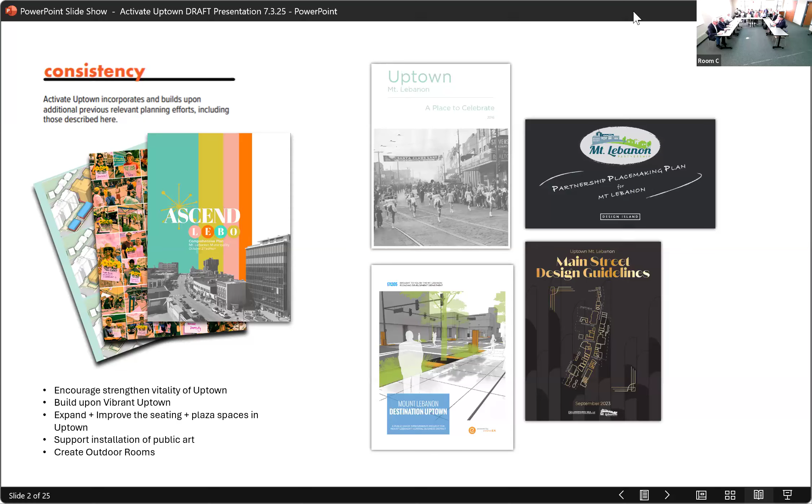So there's a lot of thought that's been given, not just in the Activate Uptown process we embarked on, but in previous iterations. In addition, when we were doing the Vibrant Uptown planning, we wanted to set the table for where we're going now with this direction. As a reminder, that was the $4 million streetscape project that is complete, where we put in new sidewalks, conduit, dark sky lighting, irrigated planters, native landscapes, and refreshed public spaces.

So, Clock Tower Plaza is a good example of what that is.

So this is the next evolution, and I mentioned the 4 different key nodes. Within those nodes there are additional sub-nodes, if you will, and we'll go through some of that, but those are the 4 key areas, which you can see illustrated on the slide. To the far left is the Clearview Common node, which also encapsulates Alfred Street, Parse Way, what I call the portal, which is the stairway connecting the PRT station to Washington Road, and then Clock Tower Plaza, which is currently where East End has a tap room.

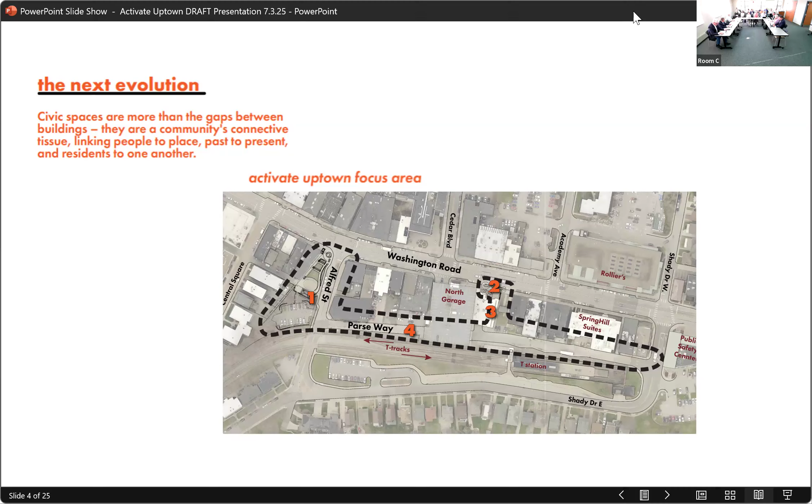It's advancing on the laptop, but not on the screen. It says my internet connection is unstable. Oh, here we go, it's stabilized. You just have to stand up. Yeah, this is like rabbit ears, you have to stand there. Give me some aluminum foil.

So Clock Tower Plaza, again, this is located at the mouth of the portal, as you can see there. These are some images of current conditions. You can see where East End Tap Room is, and you can see the mouth of the portal in some of these pictures.

Okay, so some of the ideas here that we wanted to bring to light: one, tying in the PRT station. So you'll see at the mouth of the portal PRT's graphics, that's their approved new imagery, to allow people to understand that this is the access point to our light rail station. We've heard this from Scott, who owns East End Brewing, but anyone else that's there, this gets fully exposed to sun in the afternoon, so the introduction of sunshades, you can see that here.

What you can also maybe see is that's a very long street seating wall along the planter, so there's a proposal for public art there. As you're coming up, this is really a gateway into Mount Lebanon, so here's an opportunity for public art and introducing the community to folks in that special sort of way.

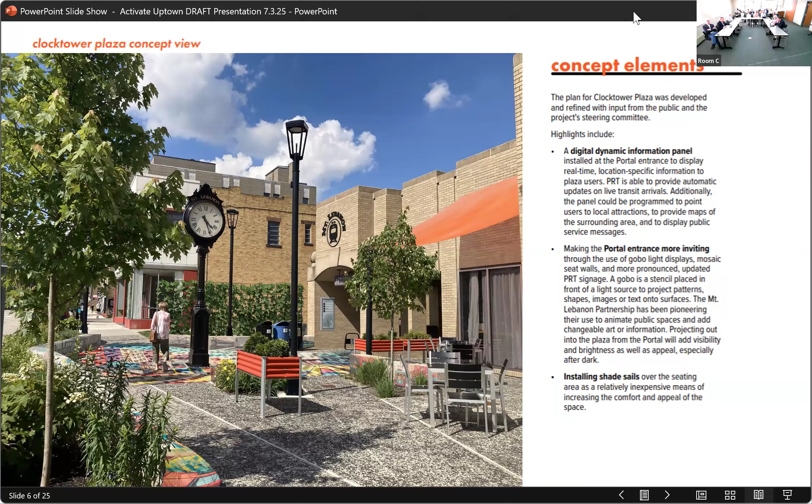So the portal is a really exciting opportunity to celebrate coming and leaving Mount Lebanon, but mostly we like to think of coming. Right now, it does have some architectural design features that are worthwhile - it has a barrel vault, it has something called an oculus towards the end. But other than that, it's a fairly utilitarian space and really doesn't celebrate or reflect the community, in our opinion.

So working with the steering committee - and I should have mentioned, I'm sorry, when we first started, the steering committee was instrumental in helping us shepherd these concepts through the public engagement process. So I just wanted to mention that.

We also heard from people in the public, from surveys and things, that this staircase felt dark even during the daytime, and it was hard to find - some people didn't even know there was an elevator there. Thank you, Sarah, and I think this image kind of illustrates that.

So through the planning process with the steering committee and public engagement and a survey, which also had a very robust response, I put that in the commission packet and memo - we had around 1,300 responses.

So again, I hear there's sometimes survey fatigue in this community, but I've not experienced that. What I've experienced is residents do want to share their thoughts and opinions, and this survey was another example of that. We had a very strong response with 1,300 folks responding.

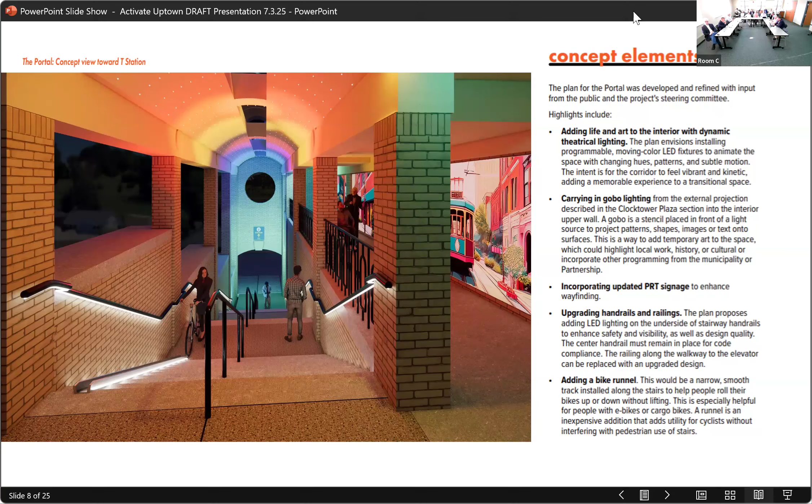So you can imagine this in the evening really being something that pops and sizzles, but it will also have that same effect in the daytime. I love this because it's simple and it's effective. I think it's marvelous. Just go with what's there and oomph it, as I like to say. Thank you, that's what we want to work off - the good bones of the existing streetscape and what we have. Very wonderful, so it's right on.

Sorry, there was a little bit of a delay here. So Parse Way has come up time and time again over a number of years. For those who don't know, it's the service alley that runs to the east of Washington Road. It's below grade, and it's sort of a crazy quilt of different uses and materials. I think these photographs give you a flavor of the current conditions of Parse Way. The municipality owns a portion of the cartway of the alley, but the lion's share of it is PRT property. So just to orient everyone to that.

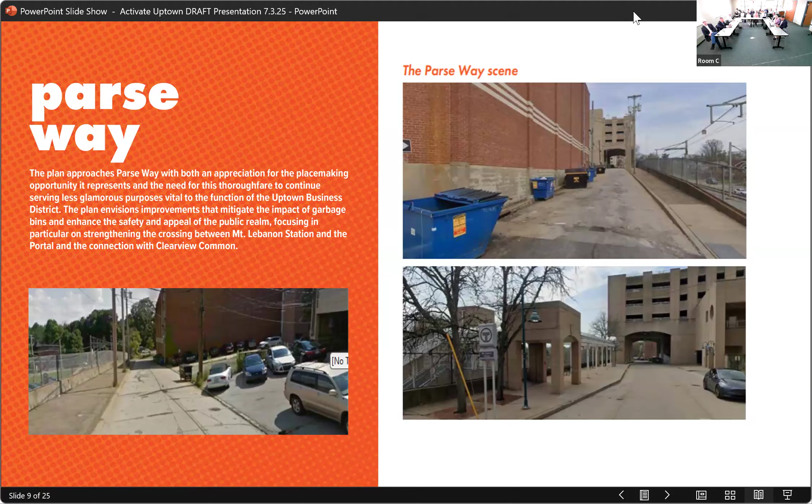There are a number of dumpsters there. We have a very vibrant business district, with a number of businesses. Those dumpsters are used by businesses on the east side of Washington Road, but also on the west side, because we do not have an alley over there. So that has led to a corral of dumpsters back there, which are not exactly the most aesthetically pleasing vessels, but necessary for the active businesses we have. You can see the entrance to the PRT light rail station in the bottom right-hand corner. So again, this gives you a taste of what the current conditions are.

Now there's a lot here to unpack, I try to be succinct with this because there's a lot on here. But what's being proposed in this slide is softening the alley with additional greenery, bringing some of the landscaping intents that we see on Washington Road down to Parse Way. What you don't see so well here is the sidewalks down there - if you've ever been down there, they're also sort of a crazy quilt of materials. You have asphalt, aggregate, concrete, you have everything. So unifying the sidewalk that's on the PRT property.

There were ideas introduced about improving the chain link fence there by adding some public art. This has come up time and time again, but adding some woven type treatments to soften that experience - basically creating a screen wall for the dumpsters so they're not quite as visible, while still allowing access for the businesses and folks servicing those dumpsters, but eliminating the unsightliness of it. There's also been discussions about marking the pavement better so folks have particular areas where the dumpsters go, so they don't migrate here and there, which helps with our code enforcement issues. Do you guys want to talk a little bit about?

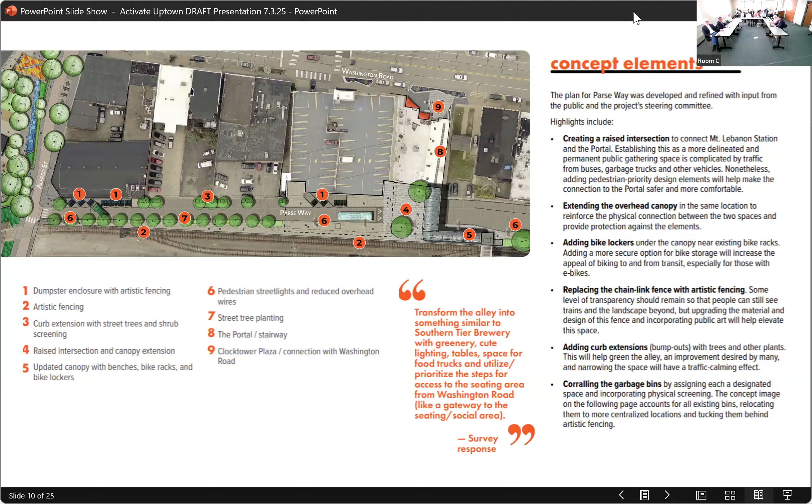If you missed them, go down to Parse Way, there are still a few of those there. So this would be an opportunity to refresh that and bring the design elements from the Vibrant Uptown project down here as well. That's something else to consider.

Now we're moving to Clearview Common and the Alfred Street corridor, and it's something I've been dubbing the big idea. Again, to Commissioner Silverman, alluding to what he brought up before, we're about to look at some big ideas and big concepts.

Within all of this, there are what I'll call a la carte options and very implementable things that we can do starting potentially as soon as next year, and some others that are more long-term, long-range thinking.

So I just want to preface it before we dive too deep into this. I think hopefully we're all familiar with Clearview Common. This is the parklet at Alfred Street and Washington. It's where Final Fridays are held, as well as many other things.

We've had weddings here, we've had lots of different things, and folks enjoying lunch or just trying to get off the hustle and bustle of Washington Road.

It's very difficult to see the pie chart, but one of the things we found, and it's not shocking but it raises an eyebrow, is that it's not really used that much.

We have some weddings there, and you will see people sitting there, and you'll see teenagers hanging out with their friends and things of that nature.

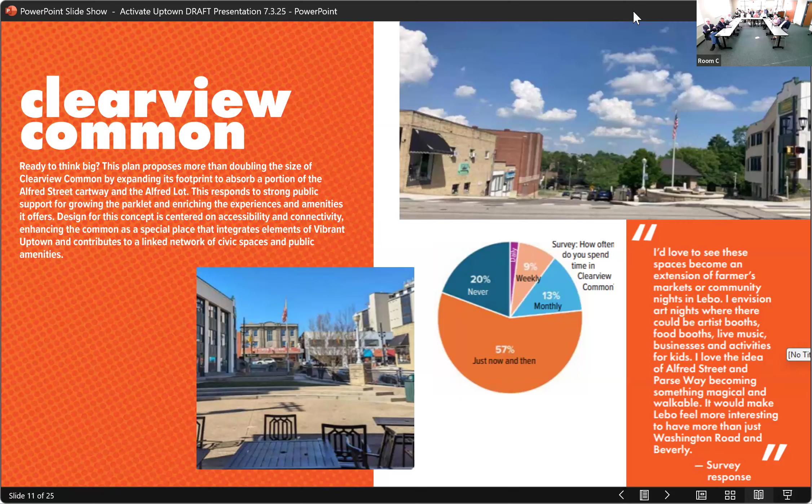Offline, I'll have to ask you to describe a meeting in a box. Sounds like... Oh, I apologize. Well, that's a very clever term from the Pashek Posse.

Basically, it's sort of a charrette on the road. They prepared a series of materials for myself and steering committee members to go out into the community. So I went to the rec center, I went to the library, went to a number of places with this kit, this meeting in a box.

So more of a pop-up? A pop-up charrette. You have the props and everything charts you need, whatever. Exactly, it sounds like you're meeting in a phone booth. No, well, if I could find a phone booth, maybe I would do that. But it was a really great concept that Patrick brought to the table.

And so that was just another way to engage people. We had cards to hand out where they could go and do the survey, and I think that really drummed up a lot of interaction via the survey. So that was just something that a lot of people expressed to us.

They're like, I don't really go to Clearview Common, maybe if there's a Final Friday or something, but now I don't go there, why would I? So we were trying to tease that out, or what would make you go there, and what would make it a destination, and not just a pass-through or a special event area.

So there's a series of concept elements here, but these images paint out sort of three different scales of what can be done, and we're going to walk through them. We're really going to spend a lot of time on the big idea, so I'll save that for when we get to those slides.

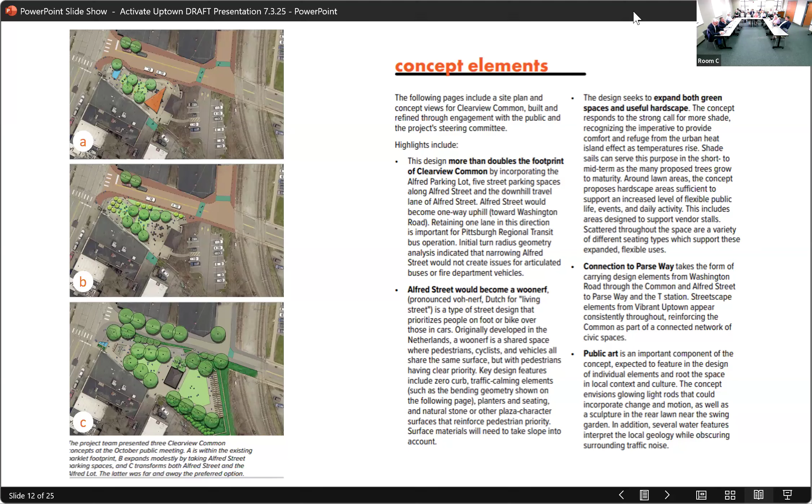Just to riff on that a little bit, I've heard this time and time again. One of the questions I get all the time is, why don't we do the farmers market down there? Because they don't want to be there, and it's that simple. It's below grade, you're shoehorning them in. It's very difficult to program anything there aside from a concert — it's really designed right now more as an amphitheater with the pavilion. When we've tried the farmers market and similar things there, it always fails. So we've adapted and adjusted, and the Uptown Farmers Market is what it is and where it is. But there's opportunity to use the space for things of that nature.

So this is getting into the big idea. This is sort of a bird's eye view of it. And it's not just about expanding the park in terms of footprint — it's also about creating a much larger zone of interest.

So let's start up at Alfred Street. You can see on this picture there's a call for a change of material on Alfred Street on the cartway, also eliminating the curb so that the street becomes level — it's a concept that Commissioner Flynn or someone else could explain better, but it's a really good one. The concept is fantastic: you're really creating a level playing field, providing a space that is more pedestrian scale and pedestrian friendly. You can't change the grade there.

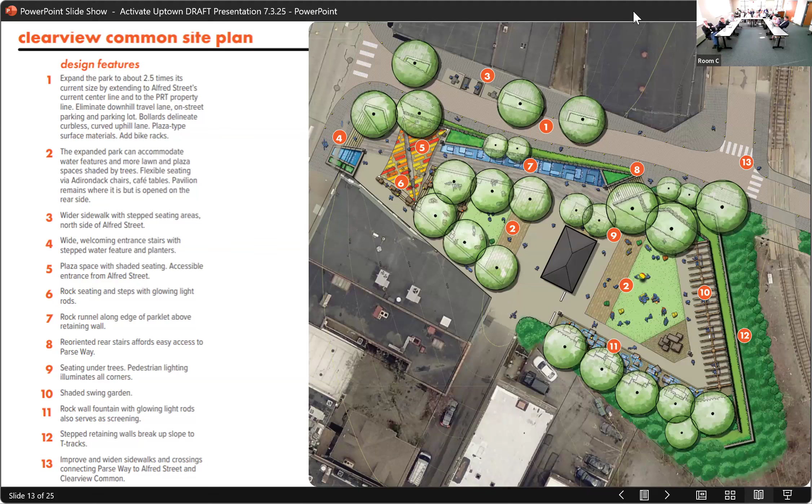We'll get into the programming and details in a little bit, but I just want to give you a broad overview. Adding new water features, additional landscaping, additional seating options, a plethora of seating options beyond just tables and chairs, really softening this up and making this an oasis point as opposed to a sidewalk on steroids with a pavilion in the middle of it.

So this is where the imagery starts to really sizzle. I think when you see these dimensional pictures, it speaks a million words about the design intent of what's possible.

I'm going to start to the left, which is currently the Alfred lot. We heard from people that they wanted different options to sit and talk to their loved ones, friends, whatever the case might be, looking for different ways to do that. On the far left, you can see some swinging benches, which offer a very relaxing opportunity to sit and enjoy a conversation or a meal or just people watch.

You see a green lawn area, which provides a space for people to simply picnic or spread out or throw a frisbee, a micro disc. There's a series of blocks there, a placeholder for the opportunity to add some sort of public art element to the area.

A water runnel, basically a cascading water feature, which provides visual interest but also adds audio stimulation and kind of deadens the sound of Washington Road. It really gives you, going back to the word oasis, creating more of a pedestrian oasis point in the middle of the central business district.

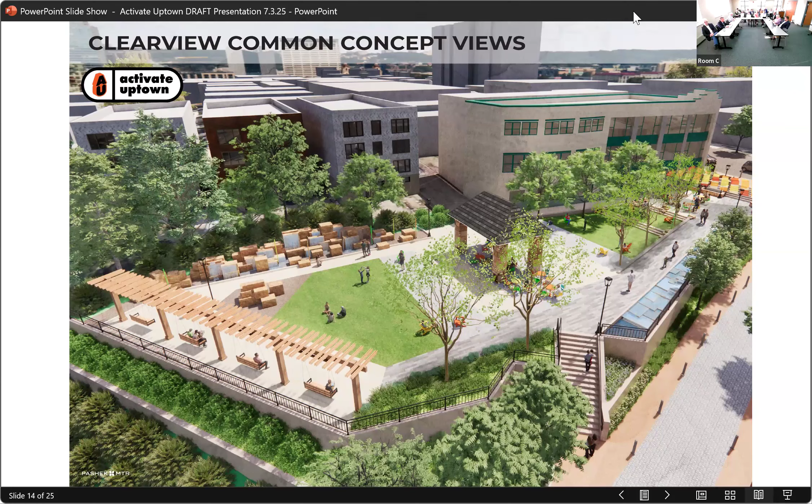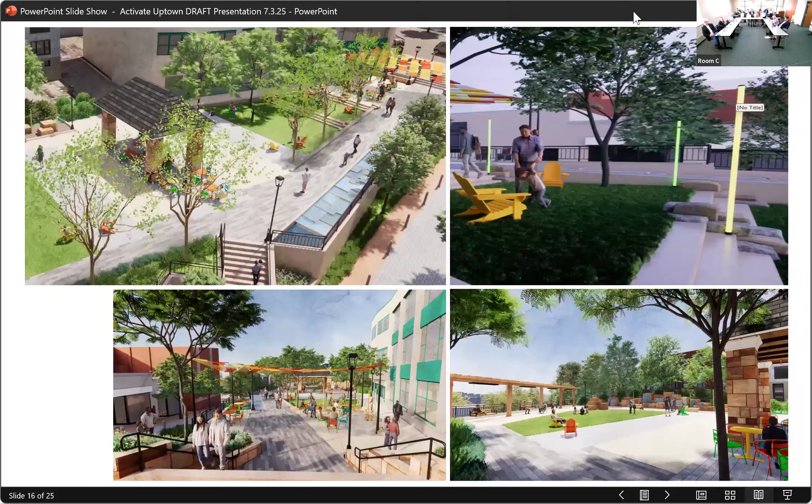Yes, I think, let me advance. This is a lot of what we spoke of, just as a close-up of that. And it's hard, you can't really see it, it's difficult to see here.

There is a notion, to your point, Commissioner, that especially by the fountain, there's a very precipitous grade as you go around that. There was discussion of feathering that out and finessing it to create a better grade for folks to access. Part of how we're able to do that is moving that fountain and creating more of an open entrance.

Also reducing Alfred down to one way and getting rid of that parking lane allowed us to really widen that area and make it a little bit flatter and easier to get in.

Sarah brought up a good point, I was going to get to it eventually, but Alfred Street would become a one-way street under this big idea concept, leading from Shady up to Washington Road. PRT was involved in those discussions about that turn radius, which came up during Vibrant Uptown as well, but the scope of that project really wasn't addressing the things we're looking to address now.

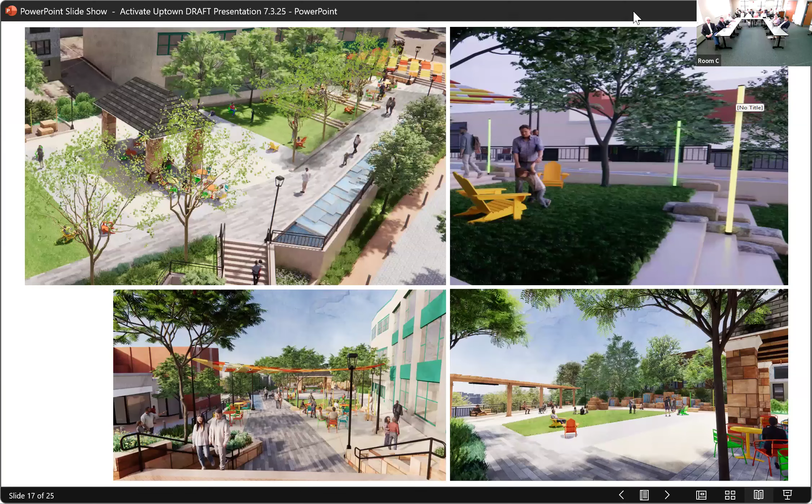So, is there any further questions? I know we're taking a lot of time and we have other folks here, but there's a lot to unpack, and you're gonna see that here in a few seconds. I don't want to speed through these next few slides, because this is really where, no pun intended, the rubber hits the road—looking at implementing.

There's a lot of stuff in this, and you received it in your packet. Patrick will be doing a report which will tease out and provide further narrative and backup to a lot of what we're presenting here this evening. Tonight is more about showing the pictures and giving you a sense of cost, things of that nature.

Moving to implementation, obviously everything costs money, so there's the notion of raising funding. The municipality would be putting some dollars to this project, but we'd also be going out to the state, the county, foundations, and other places looking for grants to bring in other dollars. We brought in $1.2 million for Vibrant Uptown, and I anticipate as we go through this process we can bring in that amount, if not more.

Again, this is a high-level concept, so as we get direction from the commission and the steering committee about how you'd like us to eat this elephant—because you don't eat it all at once, you eat it one bite at a time—there are a number of things that need to be done before we can actualize a number of these things.

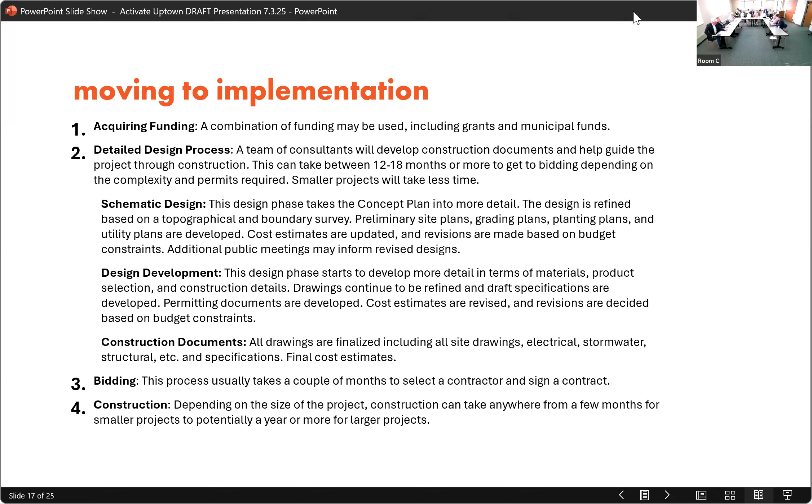So this gives just a nod to some of the potential phasing. I'll just say it right now—what I'm hoping to do in the short term is bring some potentially new furniture and sunshade, things of that nature, things we can start to implement that are scalable and don't require schematic drawings and construction drawings and PRT coordination meetings, so we can start getting to work on some of this stuff. There's a lot we can do at the portal, a lot we can do in Clock Tower Plaza—a lot we can do with Activate Uptown that we can start doing sooner rather than later.

But there are some things in Clearview Common that are going to require further study, further design, further engineering, and of course a lot of fundraising. And then we also have other projects on the horizon that we need to take into consideration. So this gives a notion of some of the phasing, and there's a lot here with numbers—we could be here for quite some time, and I know we're going to have a lot of dialogue and discussion. But these are the opinions of costs broken down into each of the nodes.

These were in the packet, but I can quickly go through. They give you the high level number, as well as some price escalation. And then we baked the 30% contingency into this, knowing that there are known knowns, and there are unknowns. So we put in a little bit higher contingency than one would find in a lot of projects. But that's just to provide us some cushion as we go through the next phases of decision making.

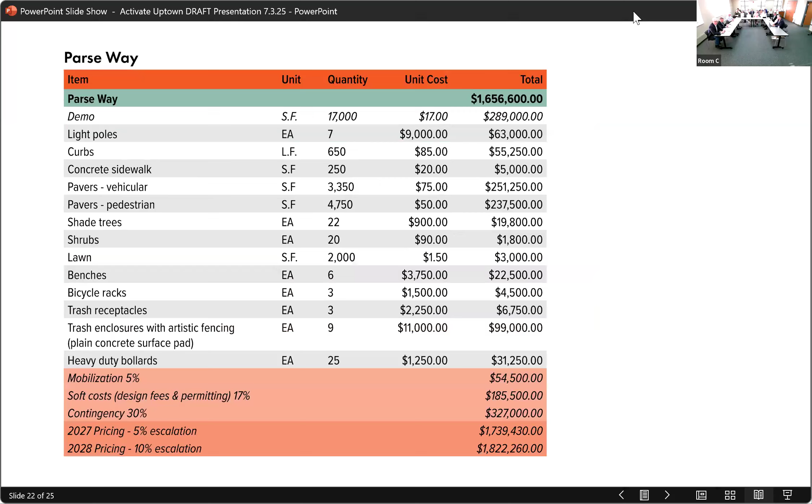So this just breaks it down, and again, I don't want to bogart the meeting here, but we'll get to the final one. So the total opinion of cost is running at just north of 7 million, and you can see those escalation prices.

So the steering committee is still active. That's members of the design committee, members of the mobility advisory board, resiliency advisory board, PRT if I didn't say that already, and this litany of folks. So they're at the ready to continue working with us as we march down this road.

I am going to be putting a few different elements of this into my 2026 budget. Not shocking, and I'll be very pragmatic in how I do that. This will also be baked into the CIP, so those numbers, now that I have them, will go into the CIP. Obviously our finance director and manager will be reviewing those things. But this is a journey we're going to be walking on. This is not an overnight project. But there are things we can do today, things we can do tomorrow, and things we could do after tomorrow. This is the Activate Uptown plan.

I think it's fantastic, I think it's great work. I appreciate all the effort that went into it, all the public input. It's an incredible number of responses, very thoughtful. Having gotten to take part in a good deal of it, it was really great turnout. There's a lot of feedback, and I think what you've come up with would seriously strengthen Uptown.

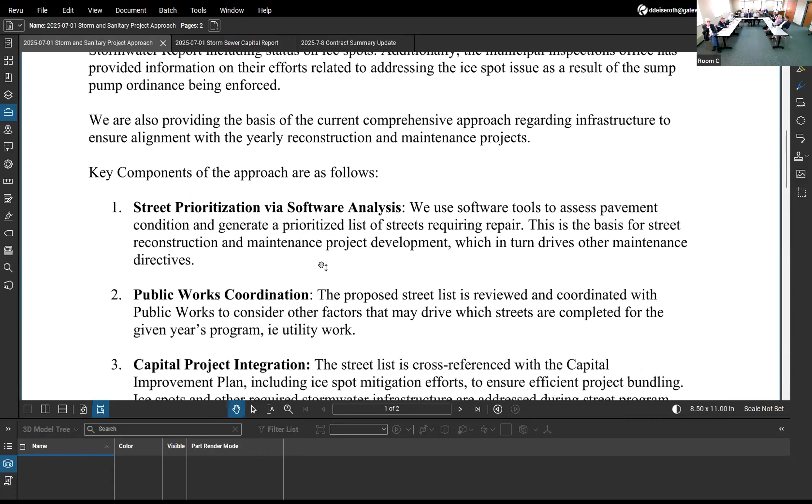Right now we're using prioritization through software. We also look at that list with Public Works and identify if that's the correct list, do we need to move anything up? That's a back and forth, but we use the software each year to develop the scope of the project based upon the condition of the road.

And then we coordinate with other things going on, other factors that might drive us. Are there utility companies doing work? Is there any other municipal project going on? For instance, this year there was a mobility issue to do some safe streets work on Scrubgrass, and we had paving that needed to be done before that. So that type of coordination makes sure we're not tripping over our own shoes.

So we do that, and then we integrate capital infrastructure, if there's anything that makes sense to bundle, as we did on the stormwater project with the road program this year. We bundled in the Ordale work, take something off the list, get something done, and it's much more efficient that way.

And then, as we talked about, we use GIS to make things come together, keep records, and make sure we do this in the best approach possible to know what we're doing from one side of the street to the next.

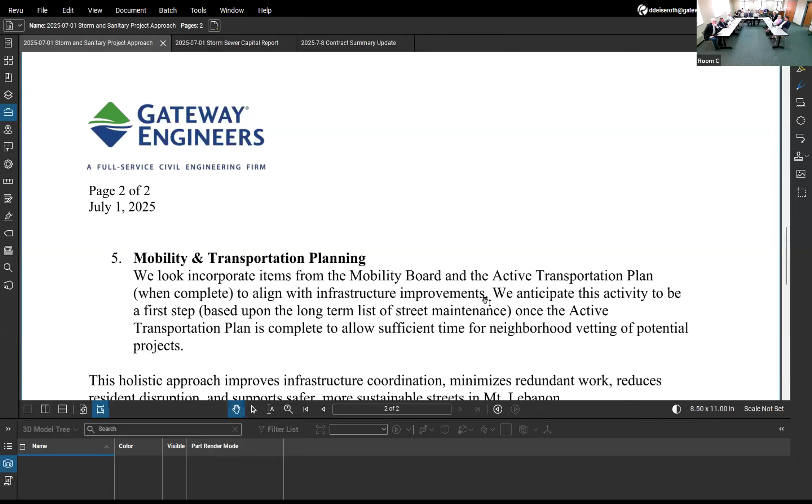And finally, I think the add-on to this is going to be the mobility and transportation planning part. When there's an active transportation plan complete, it'll be important for us to project ahead what roads are scheduled. And when we get into infrastructure that may be incorporated into streets on the list, that's going to require vetting of the neighborhood, making sure we have things lined up so that when we pave the road, we have any active transportation items covered there. So I think we do have a good holistic approach to this, and it's working well.

It can always be improved, and we continue to look for comments or anything that anybody thinks we can do better. So that's that. Any questions?

This isn't as exciting as colored pictures. I realize that, I'm trying my best. I'm looking at the audience, they're awake, so this is good, it's all right.

Yeah, nobody's sleeping yet. So the exciting thing is the next part of this is that I told Keith I thought it would be a good idea to give the commission an update on the 28 active contracts we have going on right now in terms of projects.

So we are making progress. This is a big community, there's a lot of infrastructure, there's a lot of old infrastructure, and of course there's a lot of projects that come related to that.

So just to kick it off, we gave you the list, but we broke this down into different categories. The first one up here is the point repair contract, lining, and CCTV. This is work that we bid annually or renew annually.

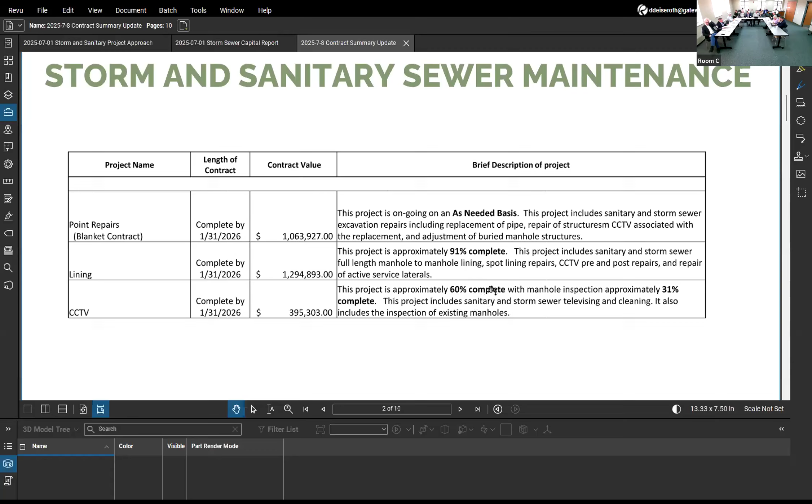Those projects are moving along. The lining project is already 91% complete, that's good, and the televising is 60% complete. So we've made good progress on those. We're halfway through the year, and we think we're in good shape.

The manhole rehabilitation project that's ongoing should be complete by early fall. It's about 33% complete right now, based on information that's been sent to us.

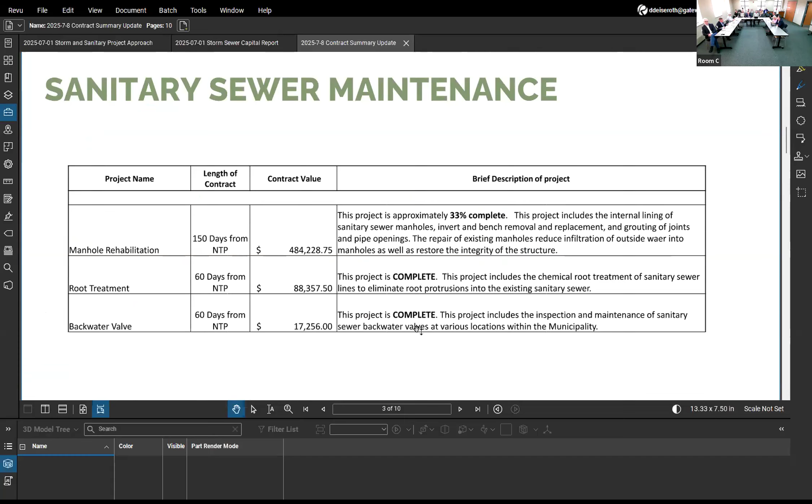Root treatment program and the backwater valve program, those are both completed. Those are typically done earlier in the year, and those are completely done.

And then the consent order, we have two big projects going on right now. The first one is our second project to meet the goal line standard. They're approximately halfway through that project. That's one where we're doing full length lining of sewers again.

We're doing adjustments to anything that needs to be done, and we're doing manhole rehabilitation as a part of that project. That one's 52% complete.

Then we have the Begg Snyder project. This is one where we were fully funded through GROW grants and the small sewer and water project. All the excavation work is complete. We're waiting for the contractor to get going with the lining and repairs to the manholes to complete the project. So that's going well.

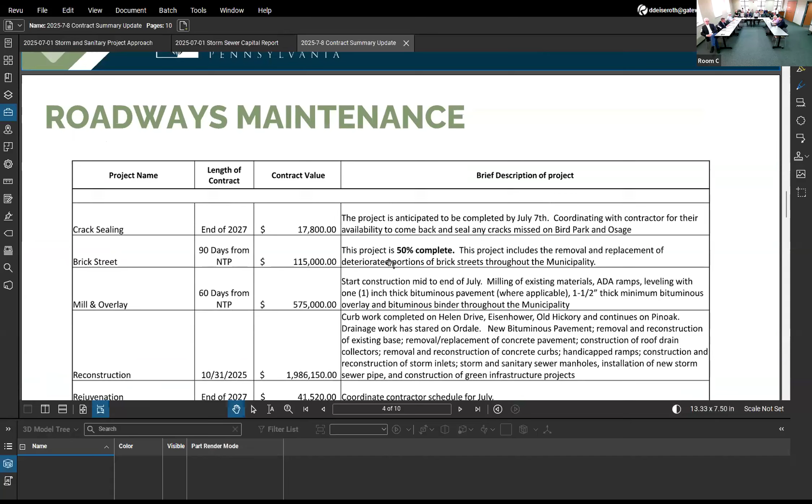Then on the road side, jumping into the road maintenance list, we have the crack sealing contract that should be wrapped up this week. They were projected to be done yesterday. Brick streets, it's about 50% complete at this point.

Mill and overlay, that's projected to kick off at the end of the month. Road reconstruction is underway. Curb work's been completed on various streets and continues on Pin Oak. And then the storm sewer project is in progress right now on Ordale before they reconstruct that piece of the road.

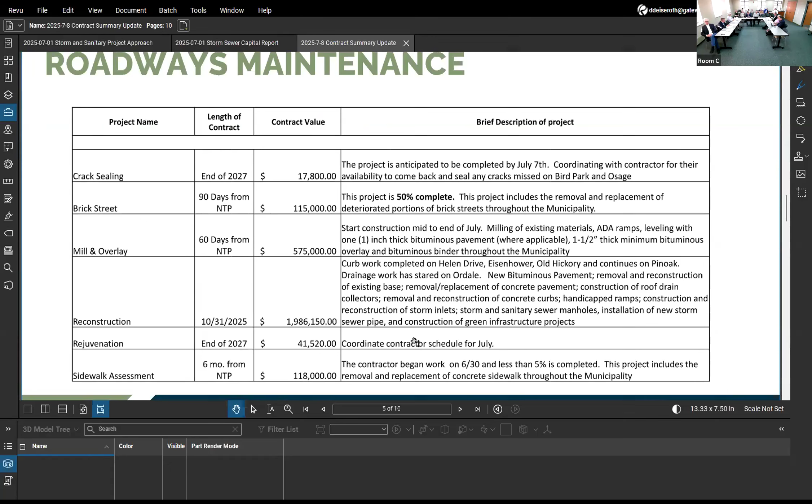The Rejuvenation project is anticipated to kick off at the end of July. And the sidewalk assessment project just kicked off last week, and it's approximately 5% complete, but it just got started.

On the pedestrian mobility and maintenance side of things, the curb work, this is the municipal contract for concrete curbs in anticipation of the paving program. That's complete. The sidewalk root control program, contractor's working on this currently. We didn't have an actual percentage complete, but he's making progress.

Washington Road, the accessible pedestrian system upgrades. This is an upgrade to the traffic signals. Work's ongoing with this, and materials have been ordered, and once they're brought in, they will be installed.

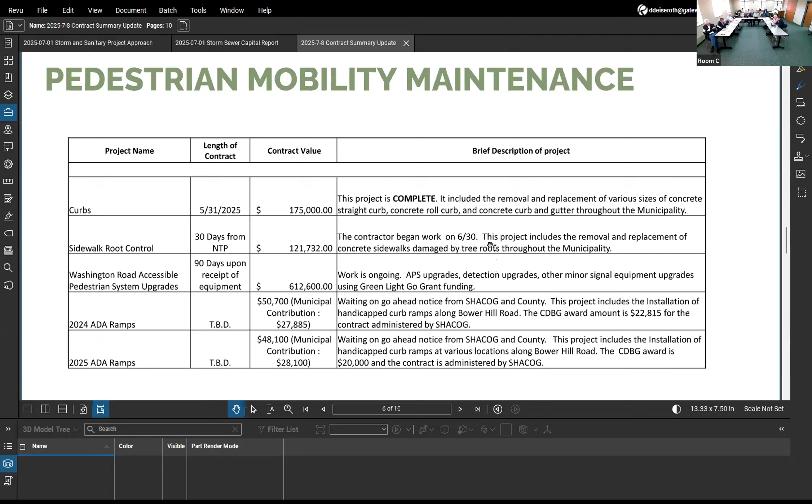The ADA ramps, we're waiting on those to be determined on the go-ahead notice from SHACOG. We do that through SHACOG. We have both the 2024 ramps and the 2025 ramps to be completed once SHACOG gives the okay.

The recreation projects, the pool filtration, we're looking to get a pre-construction meeting scheduled sometime in July here, that's being coordinated. And then that work would begin in September. That would cover the electrical component as well.

Tennis courts 3 and 4, the site work portion of that project has been complete. What's ongoing right now is the Har-Tru work. That's projected to be completed at the end of this month. There's also, this is actually summarized in the Excel at the end, but there's tennis courts 1 and 2.

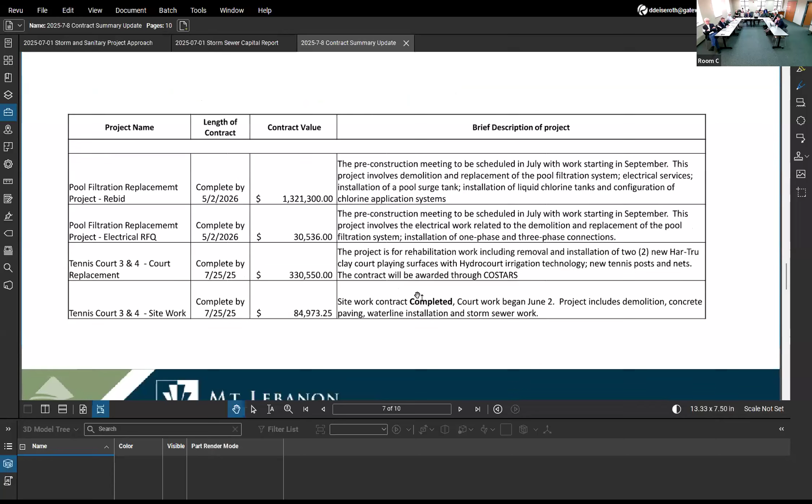Those are being converted to pickleball. That will happen after the completion of courts 3 and 4. There's also lighting upgrades that are being coordinated in conjunction with that. So there's some moving parts down there right now. That'll also be coordinated with the mill and overlay piece on Cedar.

And then Meadowcroft Park is also ongoing, and that's projected to be complete before school begins.

On the miscellaneous side of things, we have the boiler and the rooftop unit to be replaced that the commission awarded those contracts. They've been awarded, materials are ordered, and they will be installed upon receipt of the equipment.

I think the last one is the work related to the garage and the public works facade improvements. Those contracts are all executed, and we're waiting for the contractors to get started on those. It's anticipated sometime here in July on both those projects.

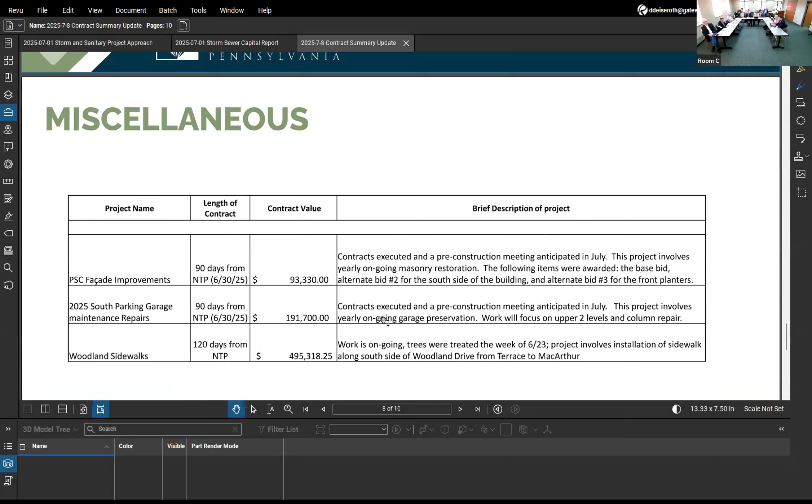And then the Woodland Sidewalk project has begun, so get ready to get phone calls. Oh, I already had. Yeah, it's never fun working in people's front yards, so keep that in mind. That's it. We're redoing part of the street at the same time.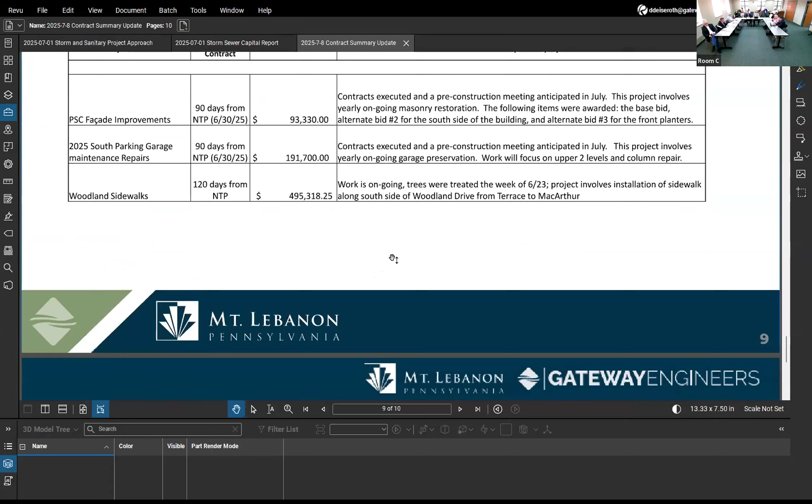Let's do it, so. This is a great summary. I mean, really, it's very nice you guys put this together. It just shows there's a lot of work going on and a lot of effort, so. Really good, straight play-by-play. This is good.

Well done. One additional piece of information just related to the lining program that we do every year, based on a conversation we had, Gateways worked with PIO to draft some language that will be posted on our website. We'll also put some mapping similar to what we do for our road program, again just trying to get more information out to the residents. We're also having the contractor provide us with a list of all properties that receive notification.